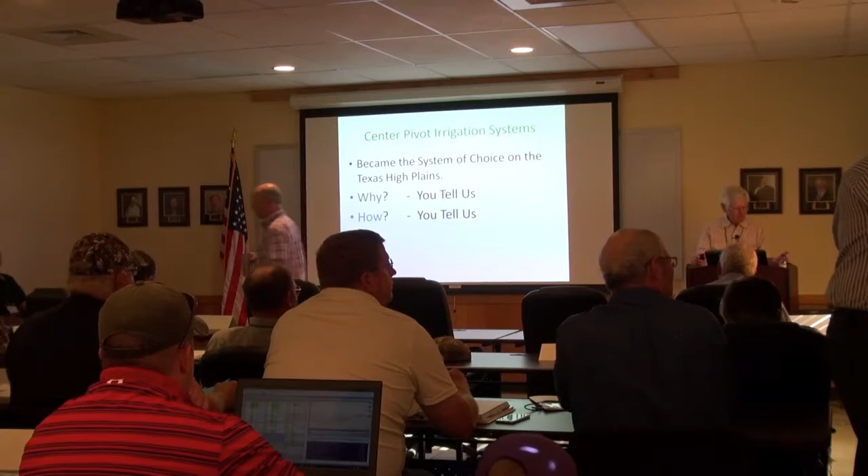Give it a whirl. Many of you know we've been there and done a little of it. I got saddled with this one because you led us here. You're the one that put me here.

You know a lot about center pivots, and some of the stuff I'm going to tell you, you already know, but we're going to go through it just to kind of tell us where we go, where we've been, and why did you go to center pivot? Let's get it open here. Why did you use center pivots in the first place?

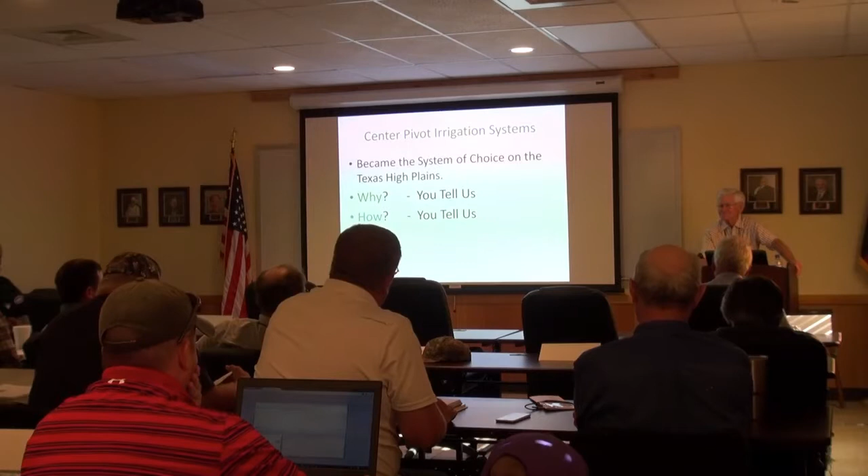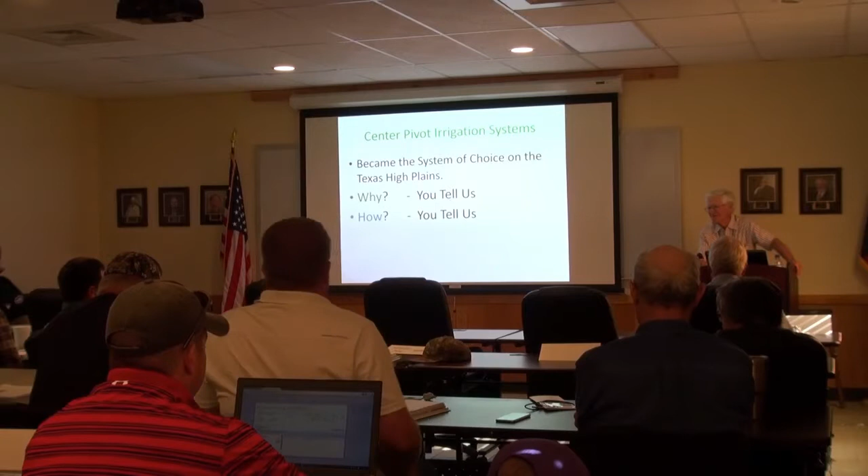You tell me. Labor. Big labor. Why are you still using them? No choice, can't afford drip. Can't afford anything else in labor, and also we save some water with the pivots.

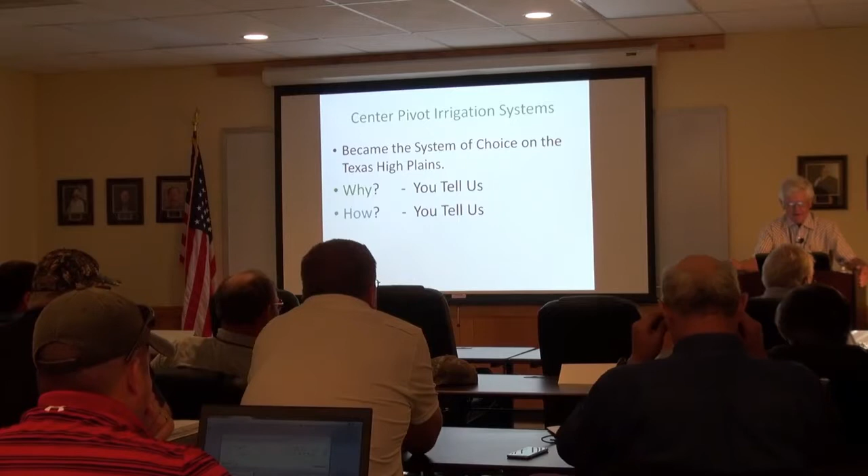And we've made a lot of changes, and we're going to concentrate today on a lot of things. We're going to go through some pretty fast, and I think we can.

My experience, the low elevation spray, we dropped down, we used the 5 degree up nozzle, and a lot of us are still using that, and it's worked real well. We did get more acres with it, but today we're going to look at maybe some other things that some people are looking at, and that's what we'll be about.

I've asked, well, let me get into that a little bit later, but Senninger is here today to help us make some decisions on some of the conversions that you may want to make in the cost share project with NRCS. And we're going to try to get that done and move forward with it.

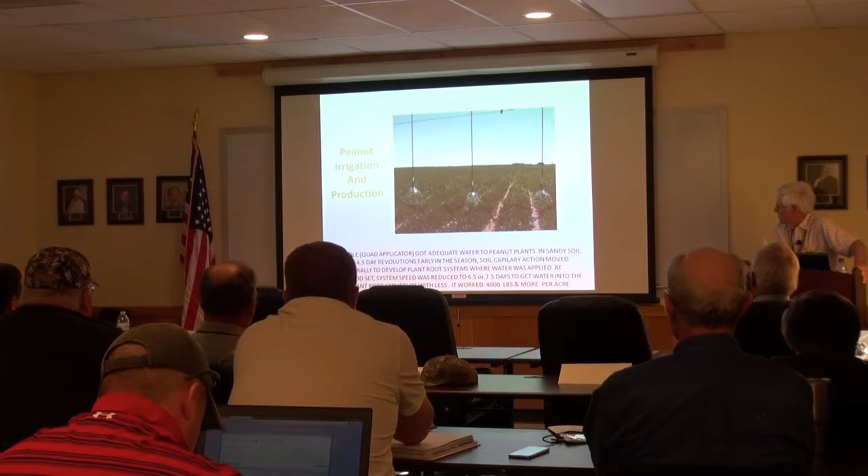This right here taught us a lot in the early days. We learned that water would move laterally in soil, sandy soil. It's just a frequency of application, and we could keep on 5-foot spacings, 60-inch spacings with the bubble. We could do pretty well. But one of the things in my experience, irrigation is about hourly and daily and seasonal soil water and plant relationships.

Back when I converted some individual spans from high impact sprinklers to low elevation spray, I had a couple of growers that I was working with said, I don't like this. I said, why? He said, I can't see the water. We used to put it above the crop, and you could see it, and you could see from the house a mile away that you were watering. Well, we can't do that anymore, can we?

So that was part of what we went through. But there are a lot of things that we can do, which we're going to try to get through in the time that we have today and get you information that you want on any conversion that you want to make.

How much water is available for plants in the soil? Many of you know the soil water holding capacity, that's important, the infiltration rate. And where we've come a long way is with the soil moisture sensors. We don't have to see the water in the sky anymore. We can see it on the plant or above the plant or in the field.

It's good to see it when you drive by if it's above water application, but we can use these soil moisture probes that was in the first session. We can track the water. How many of you are using a soil probe this summer? Quite a few of you. Is it telling you good information?

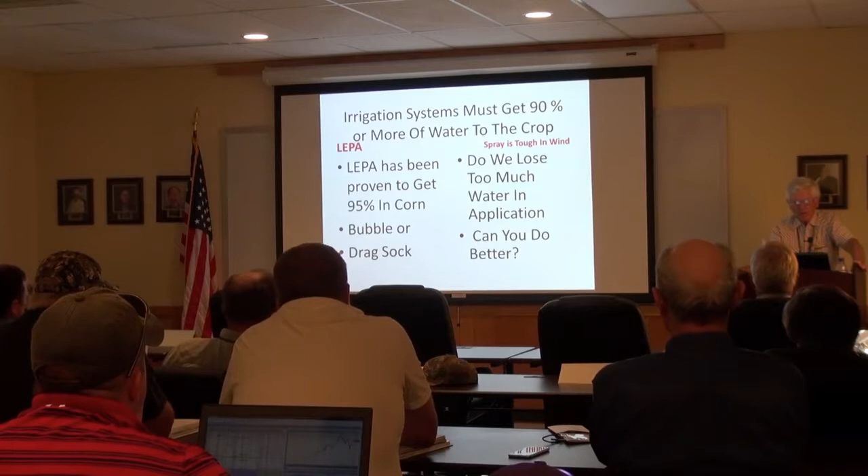Like Steve said, I did a lot of work over the years with developing LEPA, and I'm convinced that in corn we can get 95% of the water to the crop. But we're going to have to be in the bubble mode, and we're going to have to manage it.

We can manage evaporation loss by preventing mist losses, like we're going to go through some of that today, and we kind of talked about that already.

Some of you remember, and maybe some of you did go from when you were row watering. Kevin, you may not ever have row watered, but some of them did. Some of us did.

We were able to speed up the row water by about 1/3 to 25% by going to every other row irrigation. And we had a lot of discussion earlier about, well, I need to put this water over in the dry row on the next trip.

That, to me, is no. You put it where the roots have gone to the water, established it and developed to where they are, you just keep putting it back where it is.

And that's what we did with the first series of LEPA, low energy precision application, LEPA application, that is the quad head that was one of the first LEPA heads.

Any of you used that head? It was one of the first opportunities we had to go to, it would chemigate, and it's a more expensive applicator, and the reason that I've asked Senninger to be here today is to help us show you what those different optional pads are, like the LD and shroud that was in the previous picture.

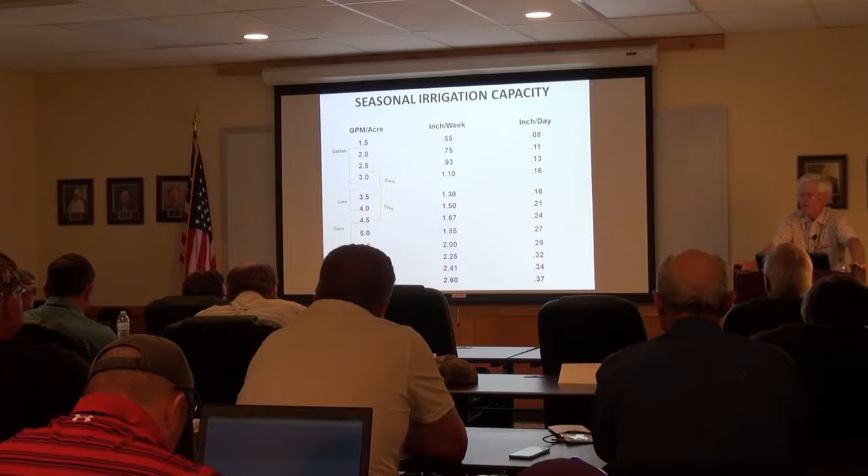But if you're nozzled at 480, and see, we can put on 1.5 inches a week, and we're using 3/10 of an inch a day, like somebody brought out there, we're not staying up with ET, so where are we? How long is it going to take us to use 1.5 inches at 100% application efficiency? 5 days? 5 days? 5 days. We got 2 other days. So what are you going to do with them?

That's where the soil water's got to come from, or a blessing from above. That's where we're now at 4 GPM per acre. If you get to what he's talking about, if we're using 3/10 of an inch a day, well, it's going to take at least 5.5 GPM per acre at 100% application efficiency. Is that right? About that.

These are in your book somewhere. For those of you in the back row that are stretching for the lower part here, I'm not sure where they are. Paul, where is Paul? Where are they in the book? Page 6. You found them, Ray? Page 6, yeah, okay. They're in the book, for those of you that references.

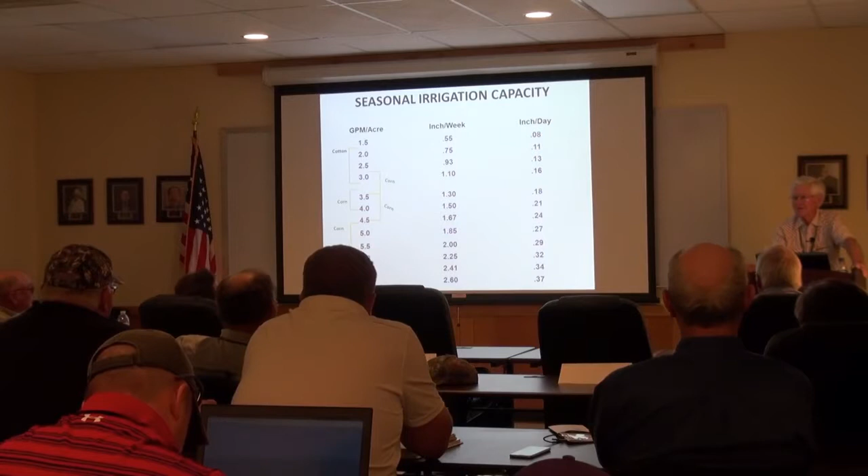And look what I've got. We've got corn all at 3 GPM per acre, and if I stood up here 8 years ago and told you we're going to grow corn with 3 GPM per acre, you'd have told me to go home and stay there. But we've got people that done pretty good with 3 GPM per acre, putting on 1.1 inch a week with that kind of application efficiency. They're using LEPA, and they may spray a couple of times before.

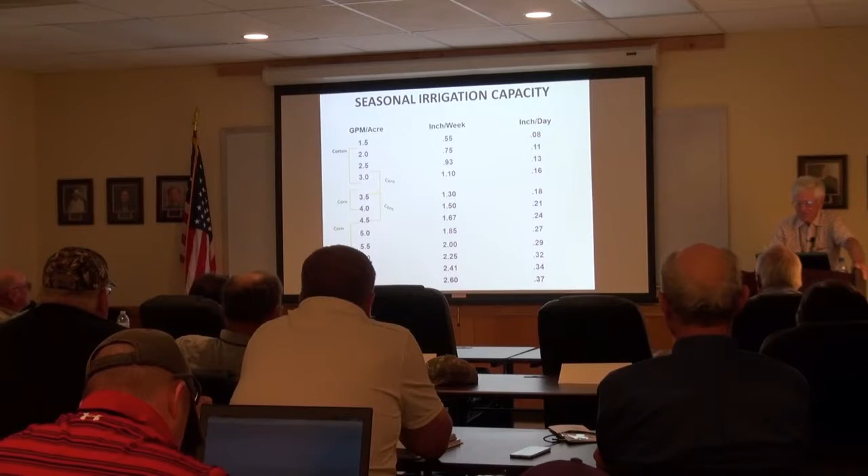Okay, someone in the class asked this question in the first session. How do you know, over in the barn, how do you know how many inches you're applying? This is how you know.

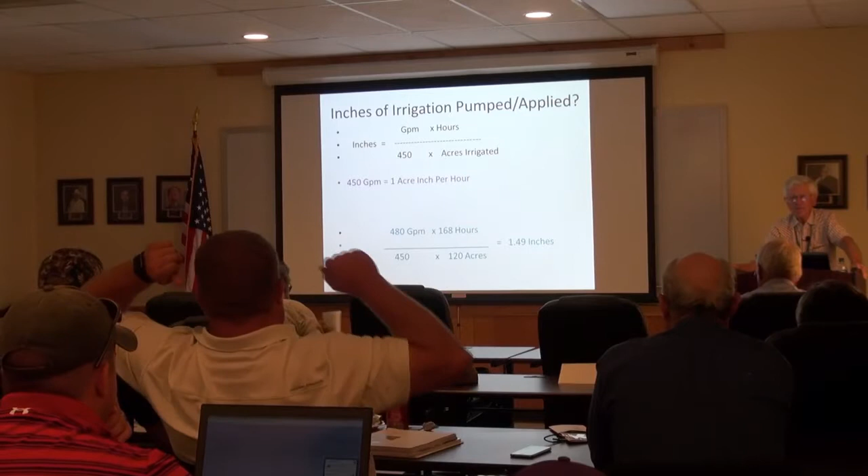It's a simple formula. The GPM of your center pivot, of your drip zone, or whatever it is, times the hours that you run that zone or that acres. 450 gallons a minute is an acre-inch an hour. It don't matter where it is, it ain't going to change. If you've got 900 GPM, Donnie, which you do on that T&L, you're pumping 2 acre inches an hour. So where are you putting it? And there's an example down there like I used before. That is the formula that's going to hold true for you whatever you do.

Someone in the class asked this question in the barn when Sean Carter was talking at the noon session. And there's your example. That baby's going to stay there and it ain't going away.

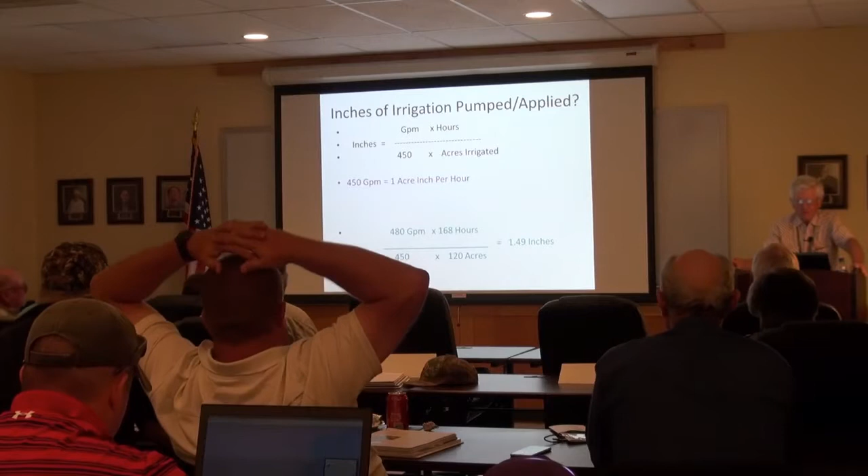The question is how much of the water, how much of the 480, are you getting to the crop? That's the question. This is what you're applying. So where is it going is another issue.

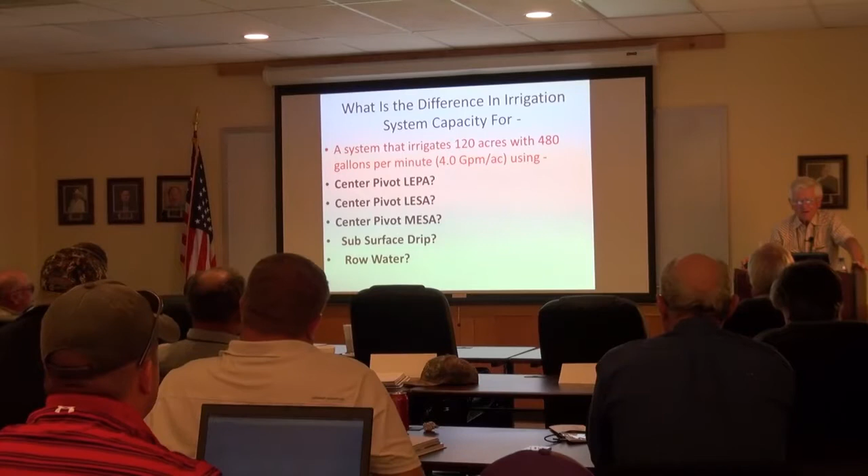Irrigation system capacity is the same, it don't matter what it is. It's 1.6, I use 500 there. It's irrigation capacity for any system at 100% efficiency is the same. The difference is where, like I said, where is the water going? And this becomes even less.

Cotton is the worst. Why? No canopy, yeah, no canopy. You got to get down, way down in that canopy if you're going to hide it. But corn's canopy is a blessing, especially if you're in a circle.

This is a reason to go in a circle, and this is not handy sometimes. But with the GPS units you guys use today, you can put that crop where you want it. And we need, one of the things we learned that I didn't say about the previous every-other-row drop, we need to be on every row, one side of every row. And one of the reasons we've got, isn't that right, Ray?

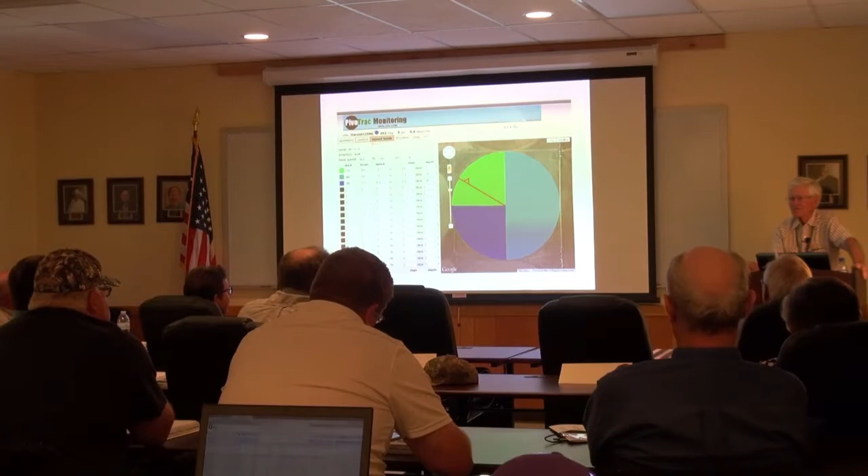We're going to put 1.1, 149, and 185 per week on the drip. That's the reason we have the drip. The district bought the drip. This is not going to be hearsay, it's going to be what happened, and it's going to give you some good data about the comparison of the two. Any questions on that? We're moving pretty good here, I hope.

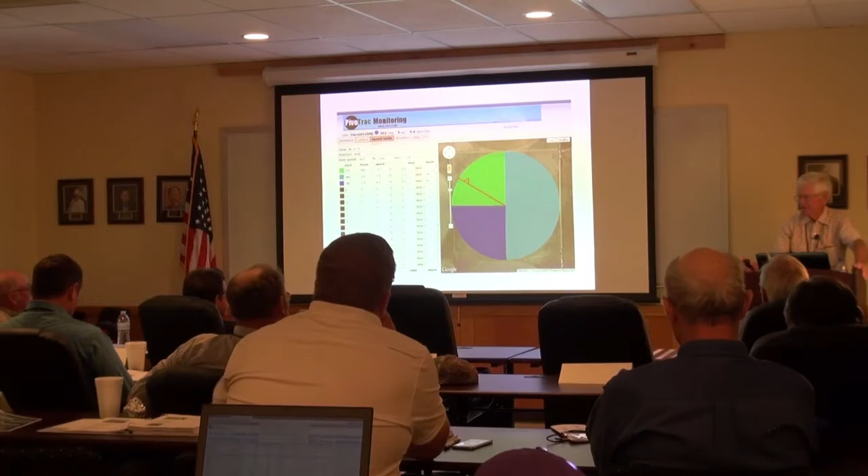The way we do that, PivoTrac runs the systems. Our FieldNet will run Danny's system. We turn it over. Only thing I know, I get a text when the system goes from one sector, or the 5, the 3, or the 4. I know when it changes systems, and that's by tracking, which Carlisle will talk to you about today.

Okay, let's go a little. Any questions on anything we've covered? Anything you want to know more about the applicators?

I'm going to talk a little bit about center pivot design. Donnie, I know you don't really care about center pivot design, but we do. When you come to us—well, he left, didn't he? Some of the rest of you, but we have to know, the guys of us working in that, what you're doing. The big thing we've already talked about is span leaks. We can tolerate 25 to 35 GPM difference on a quarter mile system at low pressure.

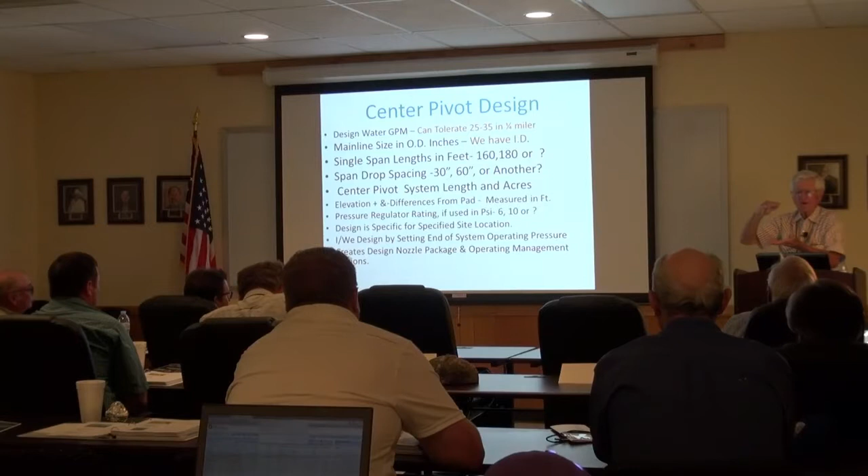One of the things that happens when you go to low pressure, if you drop from 40 pound PSI to 20 pound PSI on the operating system, what have you just done? Dropped your application rate. You changed the system. How big is your window to manage with a 40 PSI system? You drop that down to 20, you just narrowed your window, and you drop it down some more, you narrowed it some more. But you've proved that you can do that. You're the one that got us here.

You see what I'm talking about? If you drop 3 PSI on a 40 PSI system, what have you dropped? If you drop 3 PSI on a 15 PSI system, that's not the same thing. So why did you go from 40 PSI to 15? Pumping cost. What else? Mist. Application loss. Get more water to the crop that you're pumping, more water that you're pumping to the crop. So you've proven that you can do that.

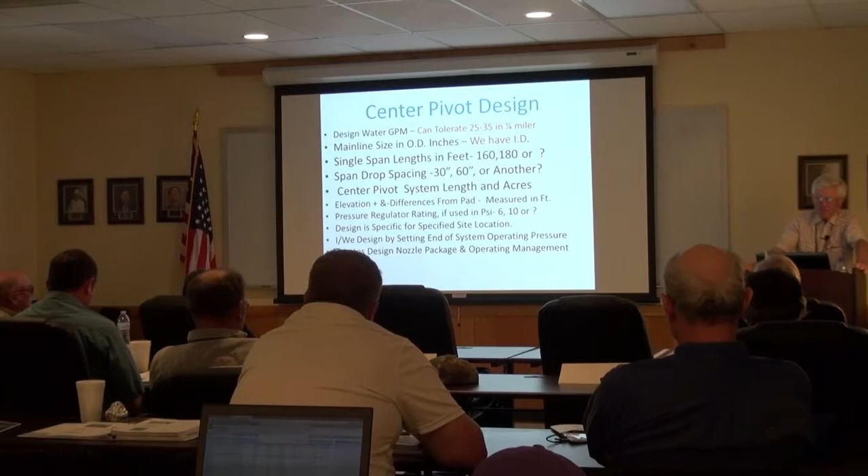We designed, one of the things I'm going to go through with you a little bit, we designed from setting an end pressure at the end of the machine. We developed this nozzle package, and I've done a lot for some of you over the years, and I went to school, I learned what it takes. Reinke and Lindsay and Valley and T-L, they have their nozzle packages as well as anybody else. We set the pressure on the end of the machine, and we'll go through that a little bit. It's a little bit different.

One of the things we know is when you get a center pivot nozzle package, you can't take it over to the other field, can you, Terry? No, this is for this system. If you change it up and move it around, it ain't going to work. So if you call me, wanting me to run a nozzle package, or one of the dealers you're dealing with, they need to know certain parts, certain information about running this pivot nozzle package for you correctly.

One of the things that happens, we need to know the elevation differences, and why do we need that? From the pad—if we're pushing water up like this, where's the water got to go? You got to push it up there. It's not going to crawl up there, you got to push it up there. So your pivot operating pressure, when it's uphill 20 feet, is going to be higher at the pad, right?

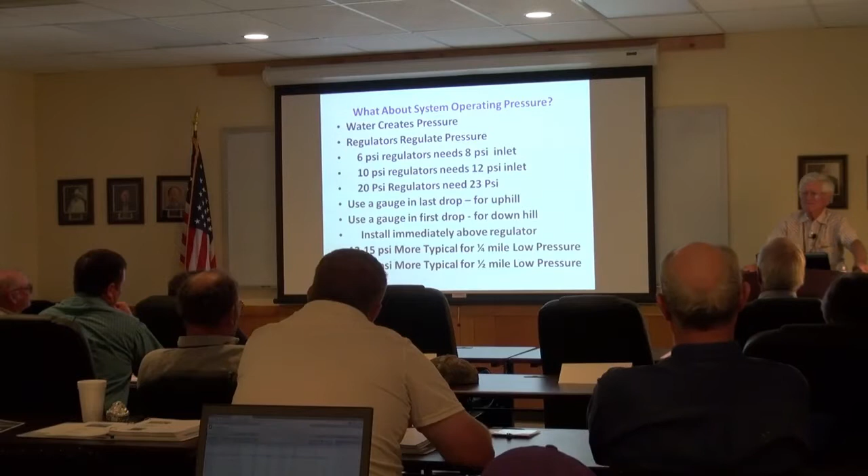What about pressure regulators? A guy called me one time and said he needed to replace his 6-pound regulator with a 10. Why would he want to do that? He must have a lot of slope in his field. But will a 6-pound hold slope? He wanted to pressure up his system with a 10-pound regulator because he wasn't pressured up with the 6. A regulator does not pressure up a machine - it controls pressure. Most of you know that. A pressure regulator regulates pressure.

It takes about 2 more pounds than the regulator rating to pressure it up properly with the inlet pressure. So if you're using 10s or 20s instead of 6s, you just ask for 4 more pounds of operating pressure - it's required to pressure it up. Because you need about 23 on a 20-pound, about 12 on a 10-pound, and about 8 on a 6. So obviously, being where I've been over the years, I'm very prejudiced to 6. And you see, if you drop water and you've got 10-pound regulators, it's going to happen faster. You can pressure up a 6-pound regulator with 8 pounds, but you can't a 10.

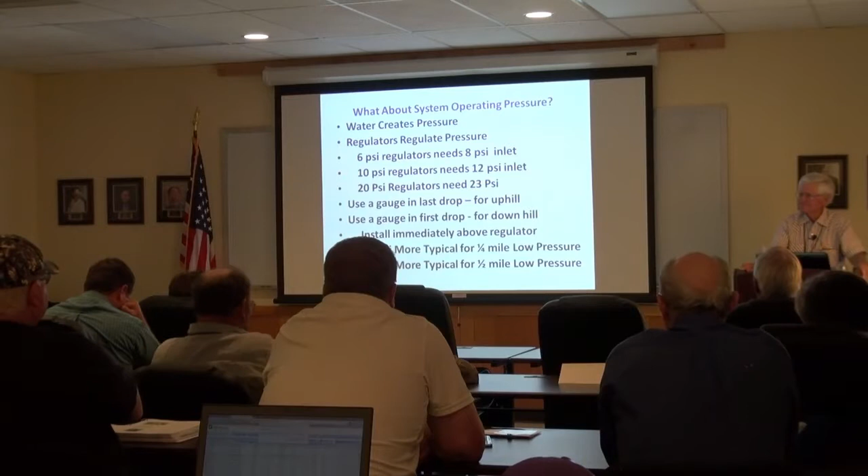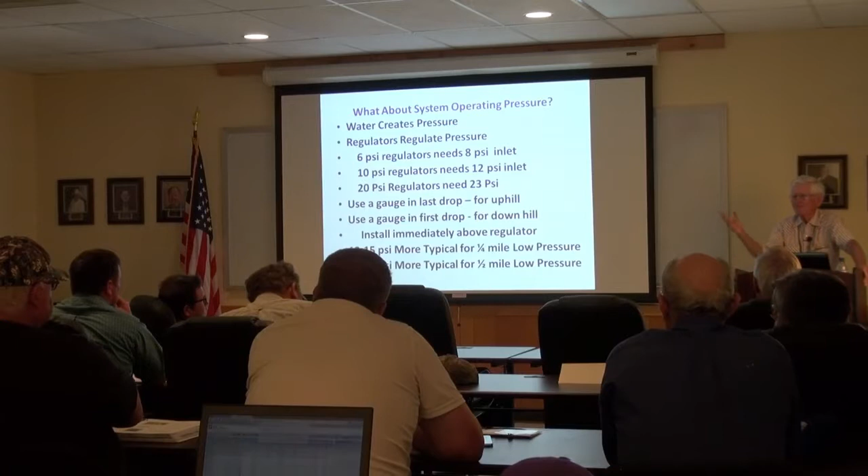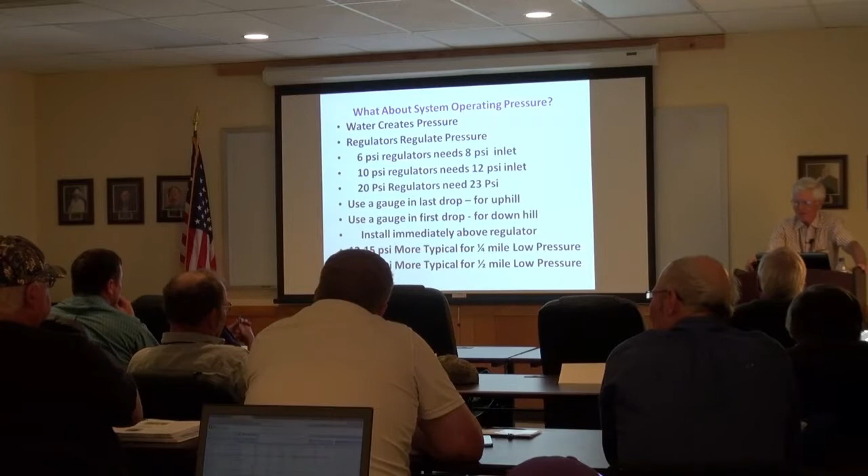It ain't gonna happen. And when you can't pressure up your regulator, it's throttling - it's not working. How many of you went to the 10-6 packages that Senninger put out when we were fumigating? Any of you? Good. We had to go to a 10-6 on the inside the span - what's called a 10-6 regulator package - to get the fumigation up on the package, up on the corn. We had to get 5 pounds, 5 feet up in the air, and so we had to do that. And there's not many of that anymore - I guess no one in here, and I don't know if they are, but it's kind of history. But we had that to deal with over the years.

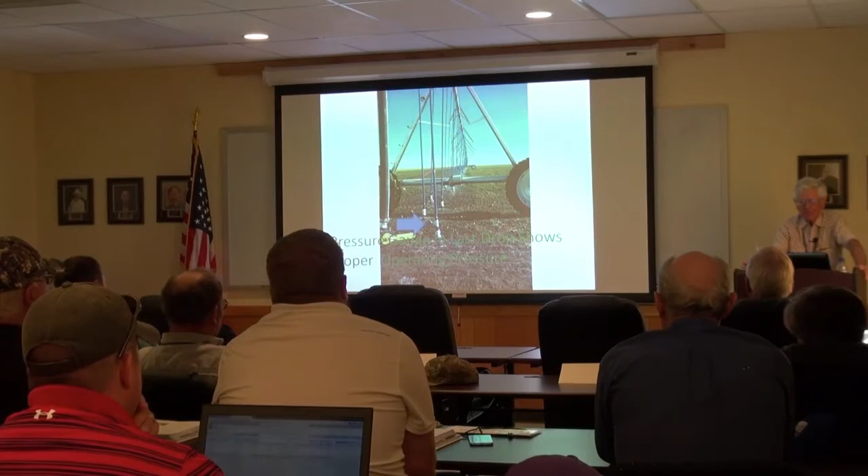But that is one of the things that we get. And like the other slide said, typically we're at 17 pounds at the pad, if you're on a system that's pretty level, or it could be uphill. It just depends, but that is the low pressure that we're working with.

One of the things that's happened to me - is the pointer working? Yeah. See, if you've got a main line up here somewhere, and you're down here, let's just say 4 feet down. Is this pressure gauge reading what's up on the main line? No. What's it reading? It's reading where it's put. So let's just say you're 4.5 feet from the main line - this right here is gonna be about 2 pounds less than what's on the main line. This has come up.

Ray's questioned me - go ahead. You're saying that would be 2 pounds less than up at the top of the main line? Other way around, yeah, other way around. Sorry, other way around. He's listening to me, that's good - I can take it. Ain't nap time yet. Okay, yeah - it's gonna be 2 pounds less on the main line.

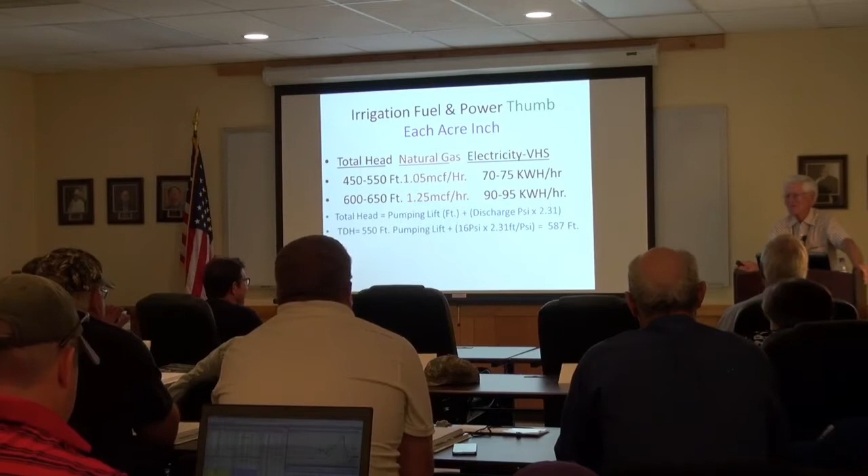We worked on it. My ears are still ringing from that 454 running 2,500 RPM. On a 3 to 2, and he still was having trouble.

That's some of the fun we had.

Okay, let's move on to the nozzle package. This is not what you... Dang, that's Austin Phisgoda. Anybody know him?

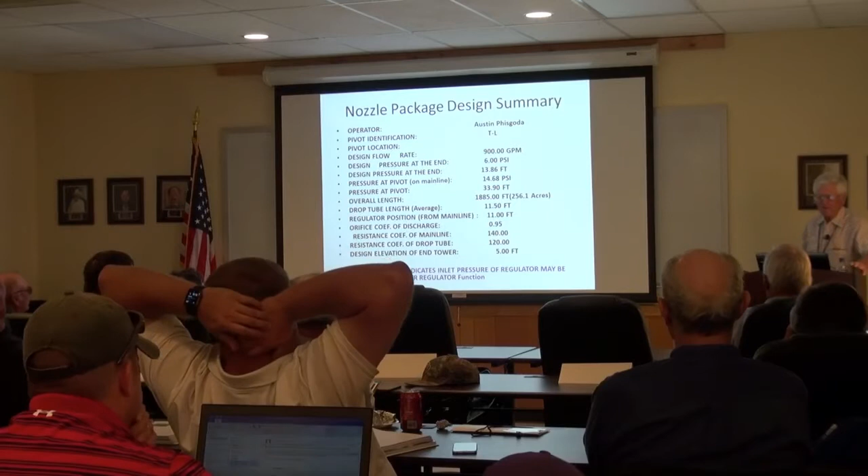Here's the other side of what we need. When you get your printout back, look at this and see if this is yours. What if I sent you Joe Blow's? What if I sent Terry and Joe Donnie's package? I done messed up, didn't I?

And I messed you up. Donnie's not going to know, except if he looks at it. Just don't go out there and start nozzling. I did that one time. I had a half-miler over here on Dale Coleman's, almost re-nozzled wet, and I looked down and I had the wrong package. Not fun, and it's getting late in the day.

I don't know, any of you know Mr. Coleman? Yeah. Was he a fun guy to work with? No. He knew him, he knew him. His patience was, anyway, he's a great guy. He built a lot of stuff, and he was one of my mentors.

But anyway, look at this thing. See, it's an 1885-foot machine, and I've got a 6 psi design pressure in it, and I know that it's pressured up. There's my drop spacing in feet. All this, these are things you don't worry about, but we do. And uphill, 5 feet, and we went with the 5 feet.

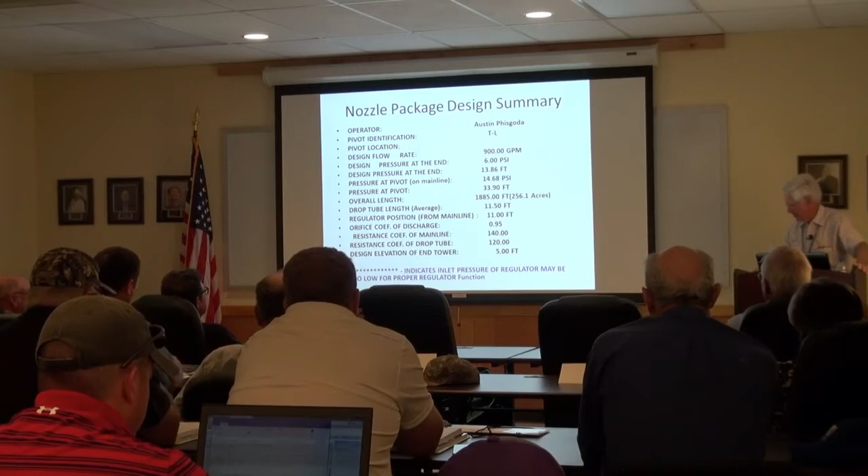So if you see that in any of your machines, then that's what it is, and let's move on. Okay, one of the things I want to point out here is your regulator working. This is still in Donnie's machine.

And for us, we're in 64s. If you're using a Nelson product, that's going to be 2 times that, it's going to be in 128. Any of you using Nelson? Okay, it's going to be in 128 instead of 64. But this is what the package says.

But what I want to point out here, look right there. Is the regulator working? Divide that by 2.31 and you get somewhere around 14 pounds. The pressure is taking 14 pounds in span 1, and then we're pressured up because we're coming out of the regulator, the 6-pound regulator, 6 times 2.31 is 13.86. So we're pressured up on all of the sheets.

But the regulator, if you didn't have regulators on there, this pressure would be about 15 pounds. I don't remember, maybe 18 pounds, maybe 20. I'd have to look back to see. We're not going there unless somebody wants to, but that's why we do that. I want to show you something else.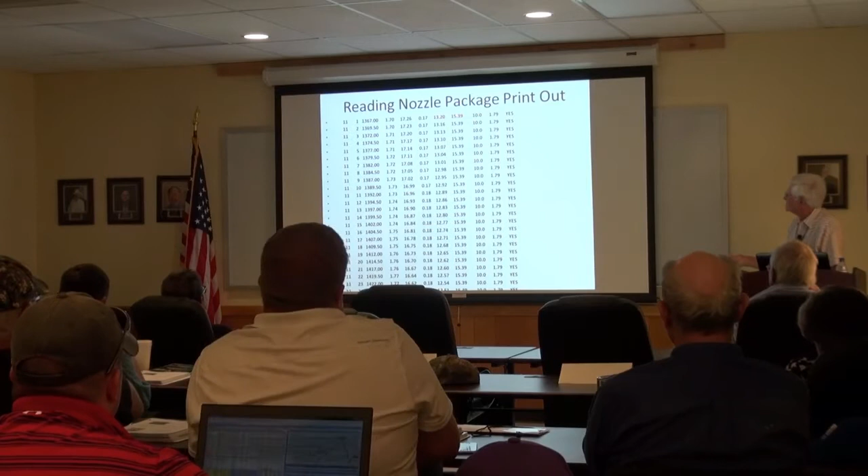We've moved on down in Donnie Austin's machine to span 11. With the 5 uphill, look how that pressure has dropped. We put out that water. Now instead of taking out 14 pounds, we're taking out like 6. But we're still operating, we've dropped off hundredths of a pound coming out of the regulator.

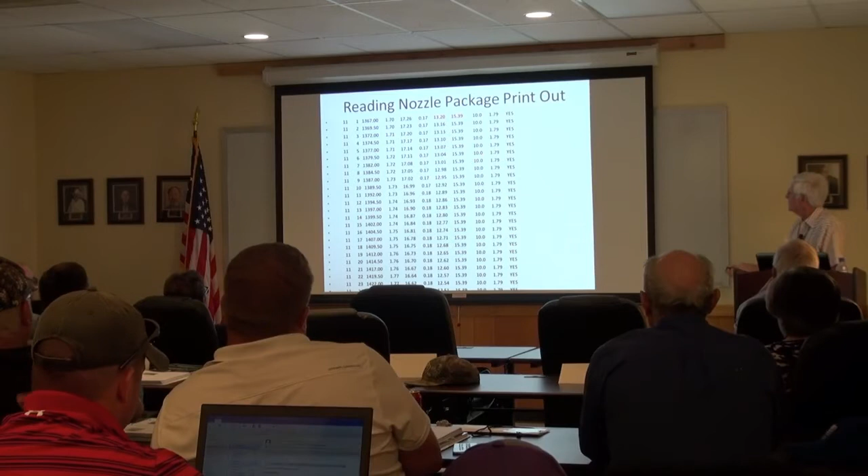So these drops in this span, Donnie, are 5 feet apart. This is Austin's T&L, and that's the reason they're 5 feet apart, is we can't do anything about that. There's not a nozzle smaller than 4. So this stays 5 feet, and then we can go to different spacing, the closer spacing when we get to span 2.

When you see Q design over here, that's a GPM that is calling for - see, we've got a donut that's 30 inches wide. What this package does, you've got a donut that's 30 inches wide, ever how many drops - 1,400 of them or something like that, ever how many drops is in there. That's what you got.

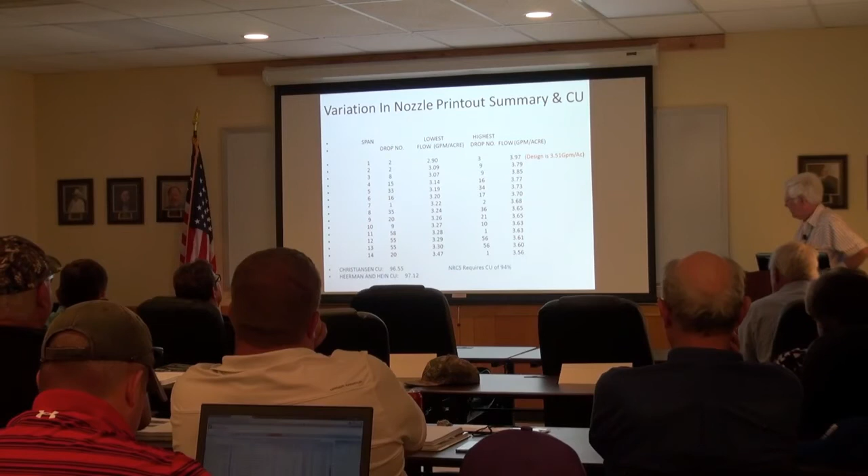For those of you going to cost share, they require your inspection. Some of you have already submitted this nozzle package, it has to go with your application, somebody's nozzle package. And on this, I have for them, there's two types of coefficient of uniformity - that's how uniform the water is going out through the system. And the difference varies in each span. See, there's 14 spans there, and we're close enough. Donnie, I don't think y'all going to worry about the difference between 3.68 and 3.51, are you? You got more worries than that one, by far. But this right here is a concern because you've got to show a 94% coefficient of uniformity.

For running the precipitation rate, we need speed. We need different speeds - the center drive, the wheel size, and the wheel tracking. And the precipitation chart, this is what we come out with. This is what y'all use. This is what you're really interested in.

What else are you interested in? This thing right here - this is your breakfast, your lunch, and your evening meal. This is what you live on. And just to show you kind of where we are with a 320 gallon a minute precipitation chart, we can put on an inch in 170 hours, and this is back to that formula that I gave you earlier. It means on how we've got a 320 acre machine, 320 gallon a minute machine on 122 acres, and we can put out an inch a week - and no, whoever brought that up, it's not staying up. But we've got a good soil profile, and we hope we'll get some rain and go from there.

Water applicators and spacing - I'm going to say a little bit about that.

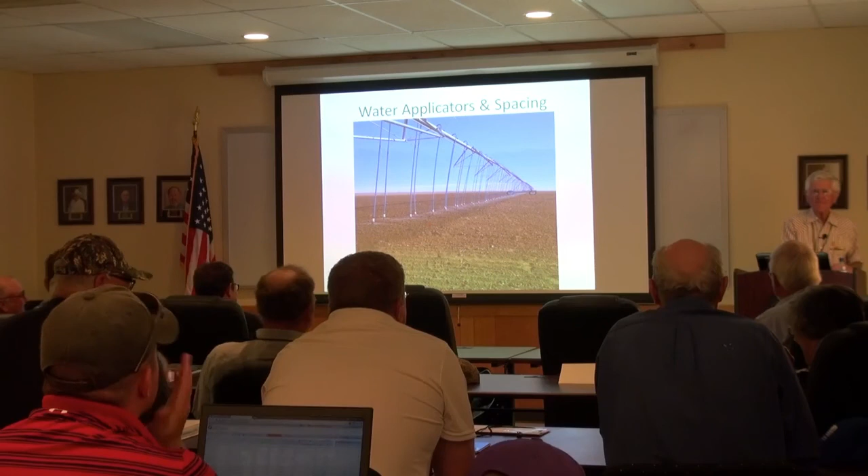Where are we on time, somebody? About time for a break. Almost, for a break, yeah. Ready? Sure, wait just a minute, 15 minutes. Is it time for the break? Whenever, as soon as you get to a good stopping spot. What time is it? It's time for a break. 10:25, okay, let's take a break. Have a break, and 15 - while if you want to go visit with the guys, and we'll let them talk right after the break on their product, but they're right outside the door. Let's take a break, 15.